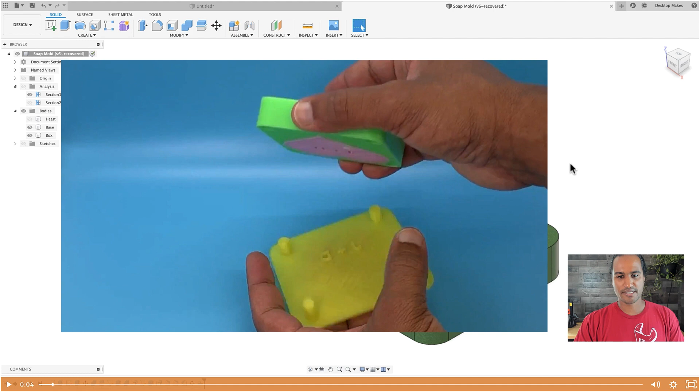Today's tutorial comes from a question from my Fusion 360 Next Level course. In that course, one of the designs we make is a soap mold, a 2-part mold. The back plate is customizable where you can create text and extrude it up, but not straight up, you extrude it with a draft angle because you need that to successfully pop out the mold. This isn't always straightforward in Fusion 360, text can be a bit finicky. Students were having issues getting the text to extrude with an angle. I took a look at the question and came up with a way to address that, so I wanted to create this quick content in case you ever have trouble with text extruding, a little trick to keep in your back pocket.

All right, let's go ahead and get started. I'm gonna just worry about the text here, I don't have to create the entire model.

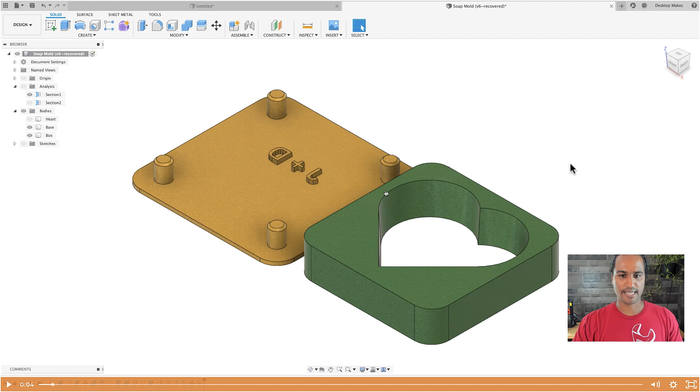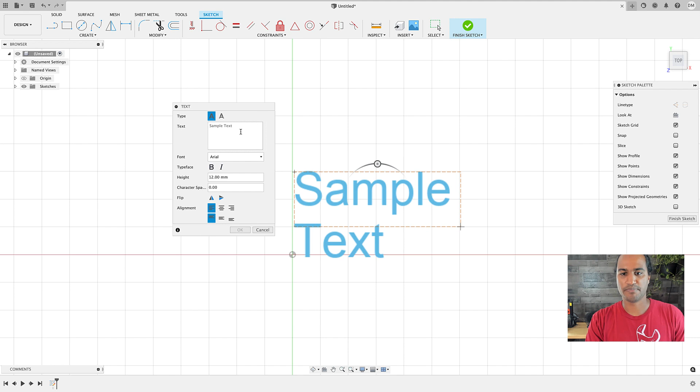I'll begin by creating a sketch on the XY plane, then go to Create and down to Text. We'll zoom in a bit and create a text box anywhere, just a general shape I want it to be. The question came from a teacher who runs a makerspace class, and she wanted to create molds that said STEAM, for science, tech, engineering, art, and math. I made the text height 12 millimeters, stuck with Arial font, clicked OK, then Finish Sketch, E for Extrude, and selected our text.

I went with a distance of 2 millimeters and a taper angle of -3, then hit Enter. Here's the problem we were getting: only the E and the M worked, and in some cases none of the letters worked. Bringing the sketch back into view, we see S, T, and A do not work. I thought about this for a while and experimented.

Going back to the timeline, I double click to get into the sketch again and tried something different, double clicking that letter. This is just troubleshooting, trying stuff to see what clues you can get. The first thing I did was change STEAM from lowercase to uppercase to see what happens. I clicked OK and finished that sketch.

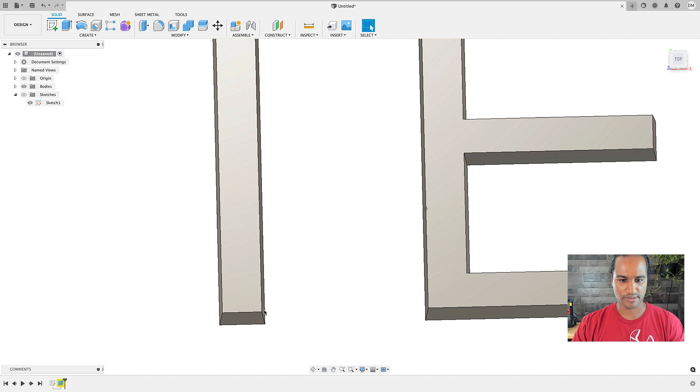Now we get something a little different, a little more success. Everything was able to extrude except the S. Going to a top view, we can see the taper angle working, wider at the base and shorter at the front. We can even verify that: if I click, this is 1.588 millimeters, and selecting the top, that's 1.3. So our taper angle was working fine, but the S is not working.

So then I thought, what's the difference between the S and the rest of the letters? One thing I see is the curvature. S is mainly a curved shape, while all the other letters have straight lines. I think Fusion has a hard time creating that S body and doing the taper angle there.

So, more troubleshooting. I thought let's go back to that sketch and try something. If double clicking isn't working for you, you can always right click and choose Edit Sketch to bring you back to that sketch. One thing I know we can do is explode text. I can right click anywhere on the selected text and go down to Explode. When you explode text, it allows you to select each profile individually, so you can extrude these at different heights, treating them as their own profile.

Let's try that. E for extrude, I'm going to select each profile here and do the same thing: a distance of 2 millimeters, taper angle of -3, and click OK. Again, same issue, everything extrudes except the S. So now let's use some of the tools we have to address this separately, since it's obviously not going to extrude by just doing a taper angle from the extrude feature.

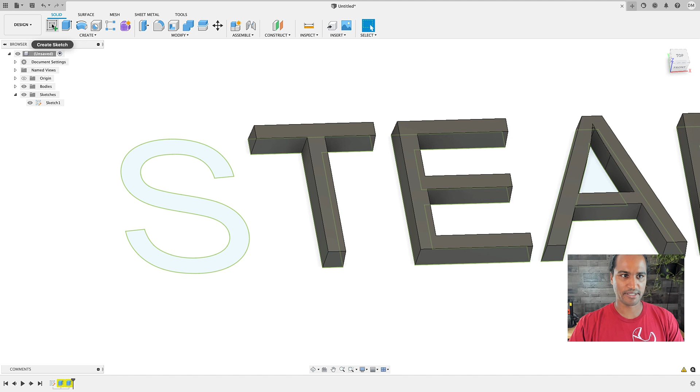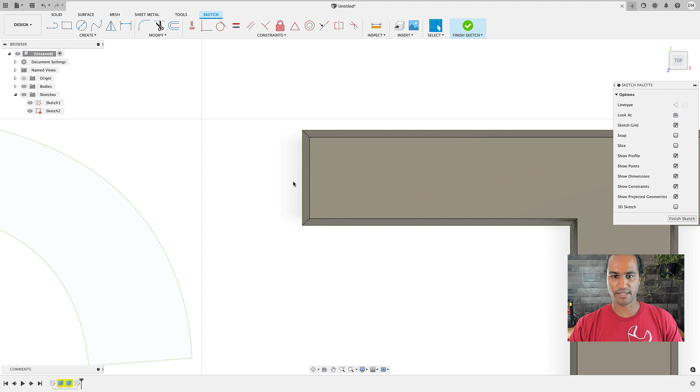I'm going to create it on top of the T profile here, just because it's going to save me a step from creating an offset plane. I can simply use the top plane of that T as where I want to create my sketch. Okay, so now let's get some information here. I want to know the distance between this edge and this edge here. So what I'm going to do is project those edges into the plane. And it's important that they be projected on that same plane so it gives me a straight dimension.

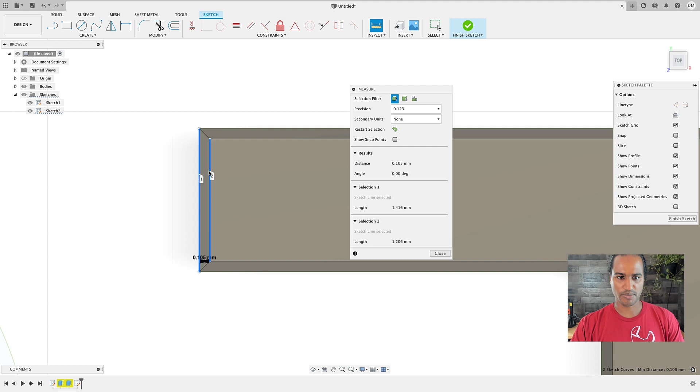Otherwise, you might be trying to get a dimension between the bottom and the top, and that's not going to work. All right, P for project, and we're just going to project these two edges here. Click OK, and then click Inspect. And I'm just going to select the two of them again, and it should give me a distance. So if I zoom in, actually I deselected, so let's try that one more time, this and this.

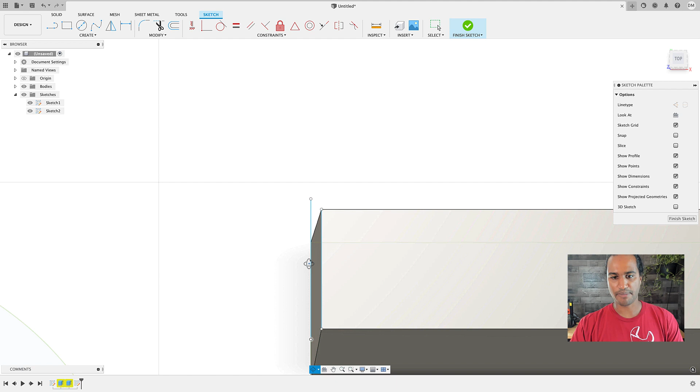We see that distance here, 0.105, we can also see it here, 0.105. So let's just go ahead and call that 0.1. So that's 0.1 distance difference between that bottom edge and the top edge on a horizontal plane. All right, now that I know that information, I'm going to click P again to project, and I'm going to project the outline of my S here.

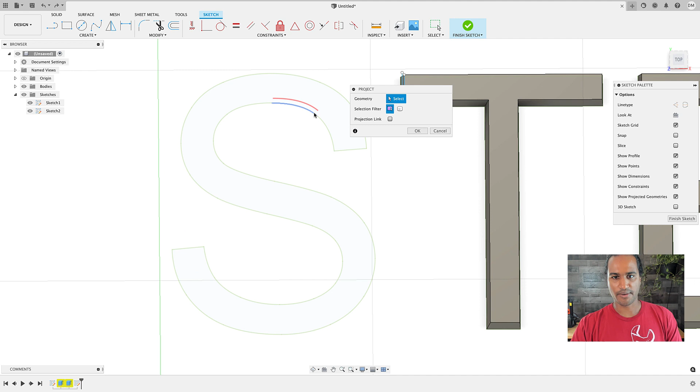Now, here's something important to note. Notice you have this option here for projection link. You're going to want that unchecked. Now I can simply double click, it'll select the entire chain. Click OK, and now that we have this, you'll also notice that it's blue instead of purple when you uncheck that projection link, meaning you can come in and modify this.

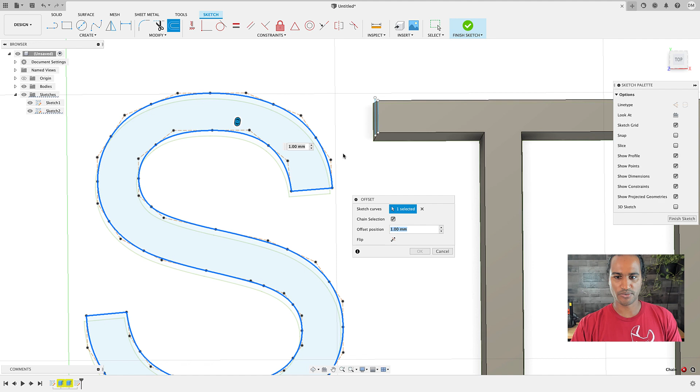So, okay, we're going to go to Modify, down to Offset. Click on the line here to select it. It gives us the entire selection. And I'm just going to enter the offset, which is that distance I measured between these two lines, and that was 0.1. And now you see the line goes inwards. If it's going in the opposite direction you want it to go, just click on this little flip button here. But that's what we want, 0.1. So I'm going to click OK. I have an offset there.

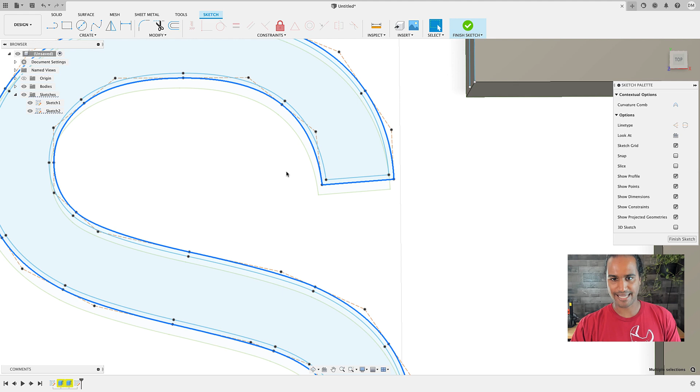And just to make this easier to loft later to select our profile, I'm going to double click to select the entire chain of that outer profile, hit X on my keyboard, and that's going to make it a construction line. Click Finish Sketch, and now we can simply go ahead and create a loft. So I'll go to Create, down to Loft, select my bottom profile here, and then select that top profile. And we're going to click OK.

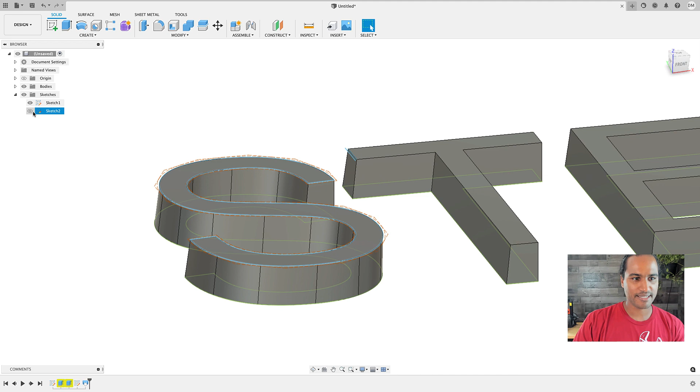And yeah, you may have noticed that didn't quite work, but that's okay. Don't give up quite yet. So let's go back and edit that loft feature on our timeline. All we have to do here is change the tangent edges from merge to keep. Now watch what happens. That does the trick. And there it is. And that gives us our shape here.

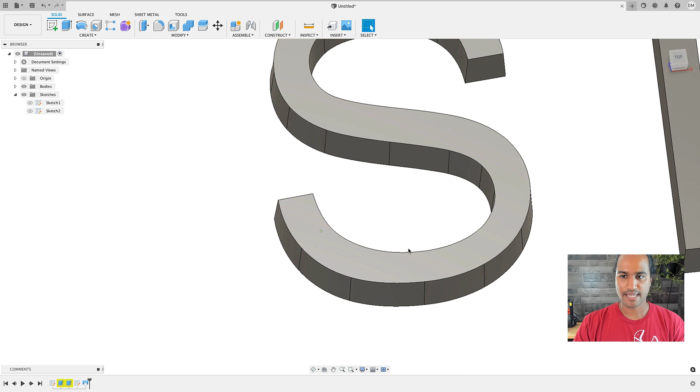If I go to a top view, you can see the difference here between that bottom edge and how it tapers to that top surface, to give us a smaller profile, essentially giving us that taper angle. Okay, and that's how you would solve this particular issue. So if you're looking to extrude text and you want that taper angle, especially if you're doing things like molds and you need that draft angle, you may find that simply trying to extrude it and giving it a taper angle may not always work, but now you have one additional tool in your toolbox that you can resort to.